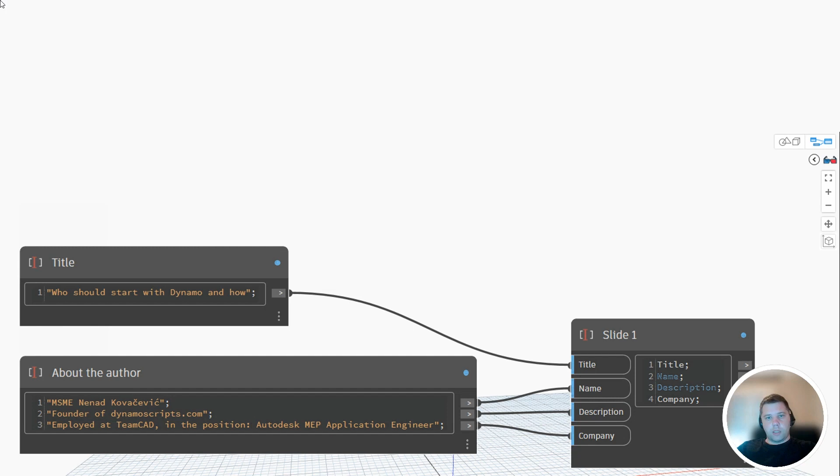The next couple of slides will be introduction, and then we will talk about the common obstacles that we have on the Dynamo trainings. It doesn't matter if you're approaching as an individual or a company. We have common issues before, during, and after the training. I want to point them out, and hopefully you will be able to skip all those obstacles that we usually have.

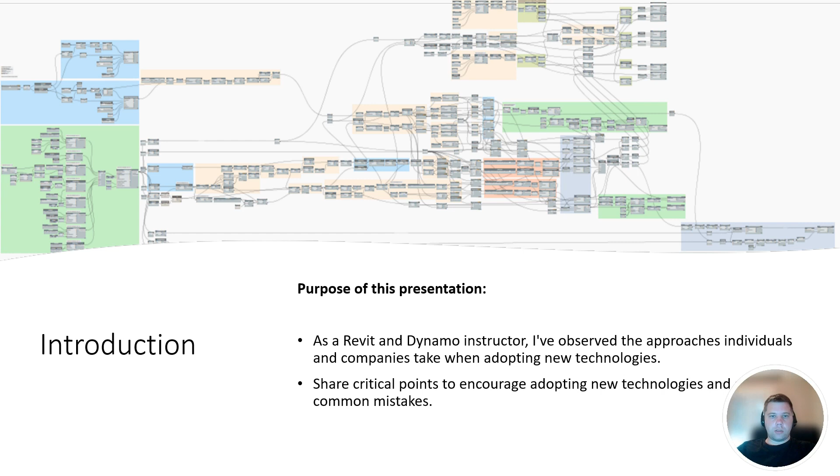Now, to answer that question, who should learn Dynamo? Basically, anyone who has heard about Dynamo and maybe saw Dynamo's capability in some videos, or maybe a colleague or somebody you know told you that with Dynamo you can create this and that, and you liked that. So if you've heard about Dynamo, that is great. If you're interested in learning Dynamo, it doesn't matter which position you're actually working in your company. As long as you are interested, that is good enough for you to start learning Dynamo.

Just before we start with implementation, we need to carefully select the people and so on. We will talk about it.

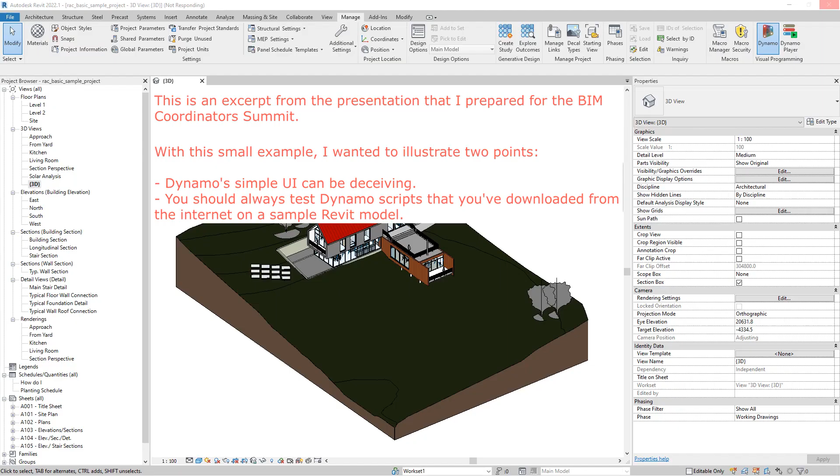If we are now talking about engineers learning Dynamo, except their previous knowledge in their fields, they will also need to learn some programming skills, because that will be necessary for them to understand that some parameter value is a text, some parameter value is a number, and when you want to change them, you cannot have a textual value placed in a field where you expect a true or false value, and that kind of stuff. I want to show you a small example of how Dynamo's simple user interface can actually be deceiving.

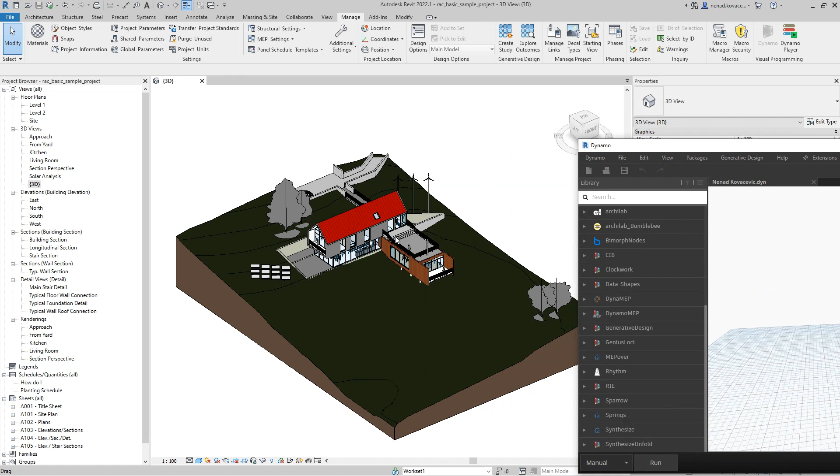Because you can do a lot with Dynamo, I will now show you one script with just a couple of nodes. So what we have over here is that Autodesk sample file. We are in some 3D view. In the 3D view we have some elements, and I turned on collaboration for this model. Now over here we have some Dynamo script with just 4 different nodes.

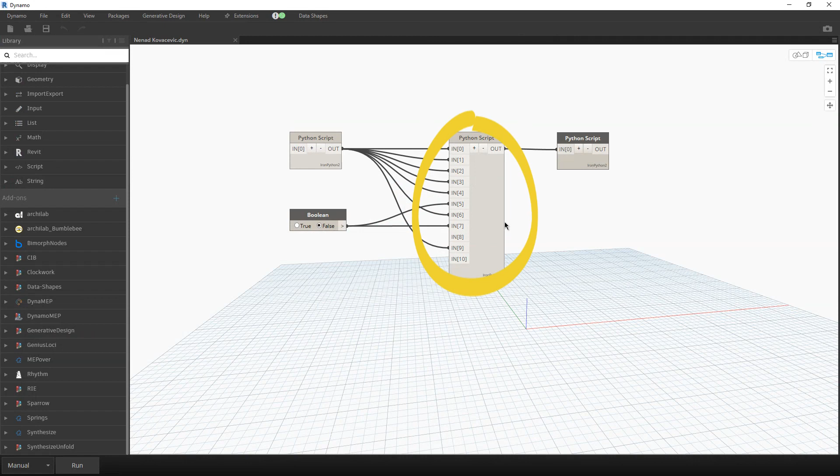What this script will do: this node will delete all the elements that you have in the view which you opened. This node over here will automatically save your local file, and it will also synchronize your model automatically. And this node over here will just throw some pop-up windows. I think I set that I need to click 10 times for this node to stop showing those windows, but you can actually type 1,000,000 times. So you will delete all the elements, save and synchronize, and you will also create a situation where the user cannot just exit from Dynamo or Revit.

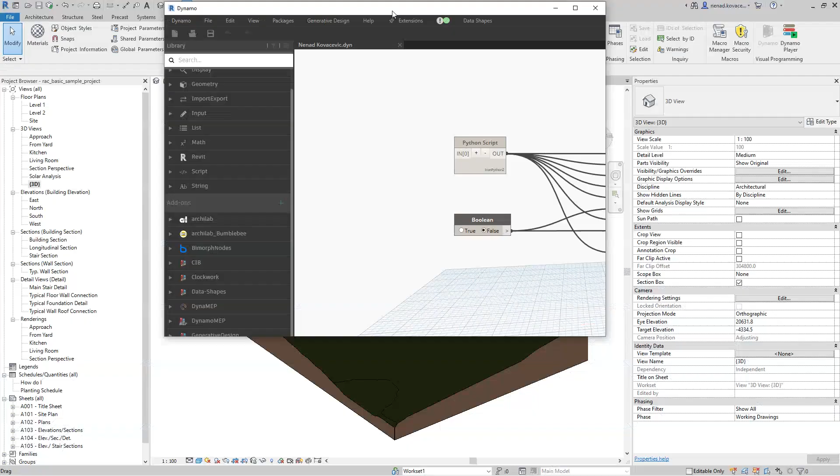Even if you click 1,000,000 times, because you already saved and synchronized, you will not be able to perform undo. So it is a simple script. Pay attention to what you're opening from the internet. Test all the scripts on some test models. Do not use scripts that you downloaded online on your actual projects.

So let's see side by side. I will click run.

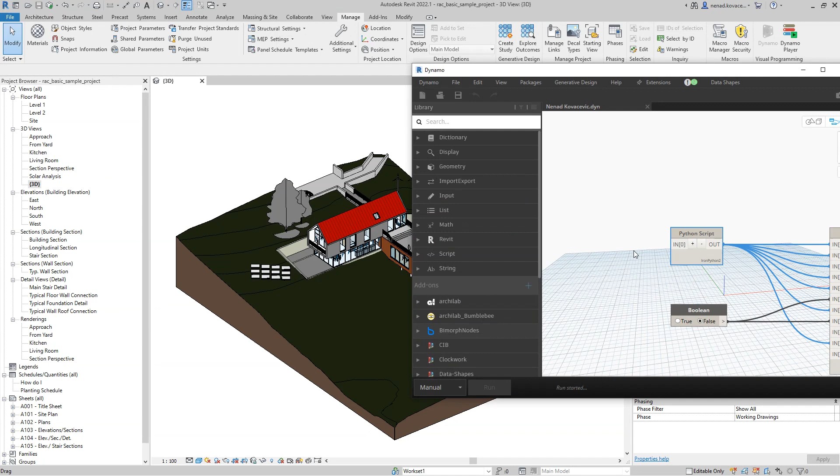So the script did delete the elements. This is an example for BIM Coordinators Summit.

So now I need to click, I think, 10 times on those pop-up windows. Okay, now everything is executed. And now, because the model is saved and it's also synchronized, I cannot undo.

And if I exit from the model and open it again, if we open the central file, you will see that we do not have those elements anymore. So let's go into the central model. And those elements are not hidden, they're actually deleted.

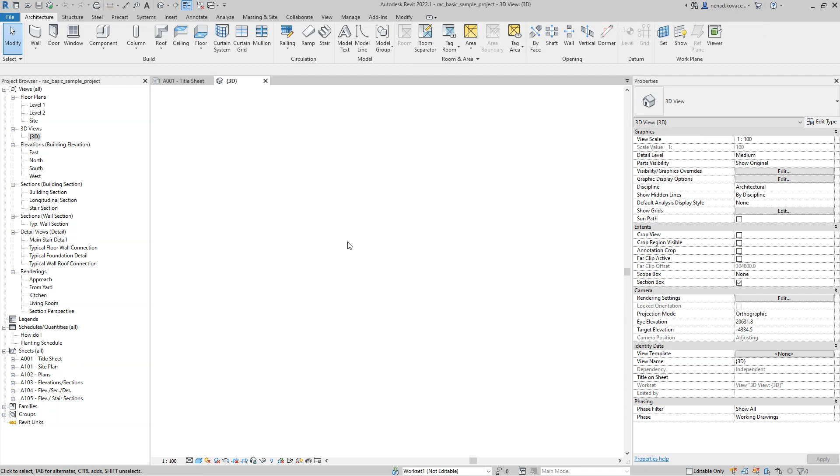So as you can see, we don't have elements over here. If something was hidden, then those elements are not deleted, because I did set into the script that we should delete all elements that are visible.

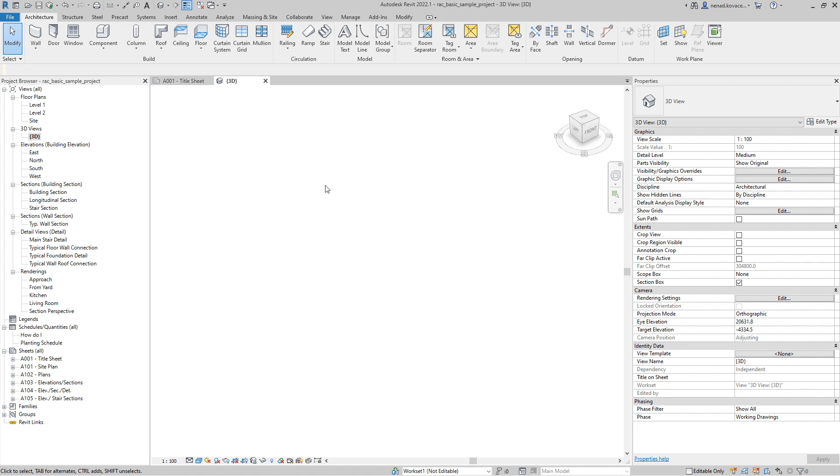And that is it, just a small example that you should test all Dynamo scripts that you receive, either from some website or from someone that you don't know, on test models. Also, you can actually create complex things in Dynamo - it doesn't matter how many nodes you have in the Dynamo script.

Okay, this is how I imagine you will have a learning path with Dynamo. You do not need to go through all of those steps. I just want to show what is possible.

Of course, the first step will always be just to open Dynamo. Usually people ask me how I need to install Dynamo. Dynamo for Revit will come with each and every version of Revit that you download and install nowadays. So by purchasing Revit, you did also get Dynamo. And when you install Revit, you will also have Dynamo.

So by going to the Manage tab and clicking on Dynamo, you did complete your first step, you did open Dynamo. And okay, now either through paid training or free online courses, in all sorts of ways you can learn Dynamo.

I never did pay for any course regarding Revit or Dynamo. I did learn everything by myself, so you can also do it. You just need to have enough time and you need to have some discipline.

Our paid courses are mainly for people who do not have so much free time on their own to learn, because on our courses we will tell you what you need to learn immediately, what things you can learn later, and we can also focus on exactly what you need.